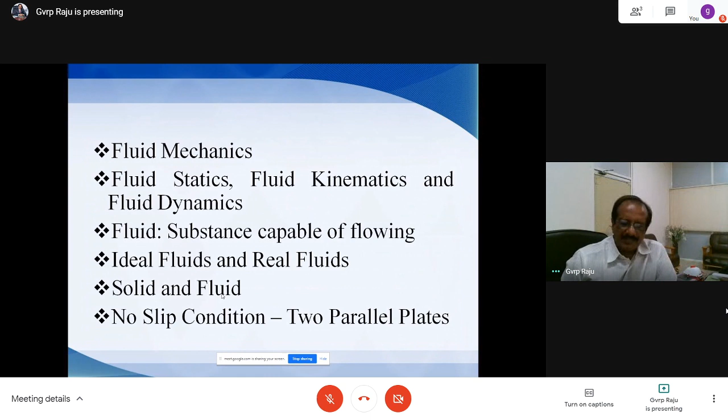When there is no relative motion between the stationary plate and the fluid on the stationary plate, we can say that it is no slip condition. Very important from objective, GATE point of view. I'll come back to the viscosity. So when there is no relative motion between the stationary plate and the fluid which is close to the stationary plate, we can say that it is no slip condition.

Then the fundamental properties of the fluid. In fluid mechanics, the fundamental properties are very, very important. You will be getting these properties in almost each and every part of your fluid mechanics subject: fluid dynamics, fluid statics, flow through pipes, etc. The student who is not aware of the fundamental properties will face difficulty in understanding the subsequent chapters.

It is not difficult to know the fundamental properties, but one issue in fluid mechanics, particularly for civil and mechanical students, is you should have confidence in units also. What are the units for a particular property? The conversion of one system of units to another is also very important. For example, take mass density. Mass per volume, very clear. Mass of the fluid in a given volume, at 4 degrees centigrade normally for water.

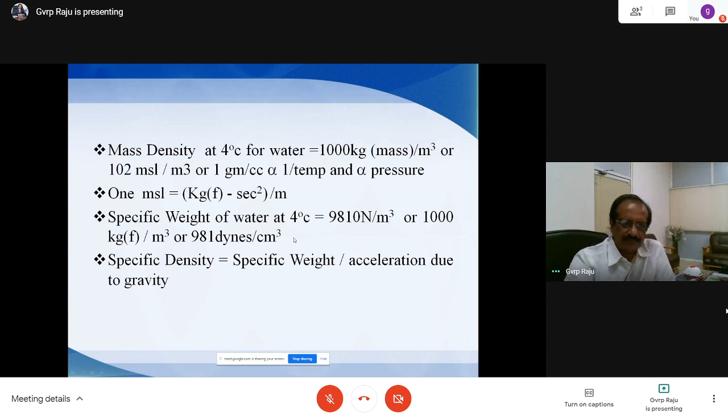The other is specific density, in other words, mass density. Mass density rho is equal to specific weight by acceleration due to gravity. g, as you know, is 9.81 meters per second square. So specific density is equal to specific weight by gravity. Density is normally represented as rho, and the specific weight is small w, by small g. So rho is equal to w by g. It is a very important, very small relation. The other one is specific volume.

Specific volume is the reciprocal of mass density or specific weight. For gas problems and gas flows, you can take specific volume as the reciprocal of mass density. That means specific volume equals 1 by mass density or 1 by specific weight, that is, 1 by rho or 1 by small w.

What is the unit of specific volume? Since it is 1 by rho, it is meter cube per kg. As you know, the unit of mass density is kg mass per meter cube, so specific volume is meter cube per kg mass, the reverse. Again, specific weight is Newton per meter cube in SI system, so the unit of specific volume is meter cube per Newton. It is just the reciprocal of mass density and specific weight.

Don't confuse about the units. Specific volume unit is 1 by rho, and specific weight is 1 by small w. That means meter cube by kg force, and meter cube by Newton also. So volume of the fluid by specific weight or 1 by rho, the units are the same. So meter cube, either I can take meter cube by Newton or meter cube by kg.

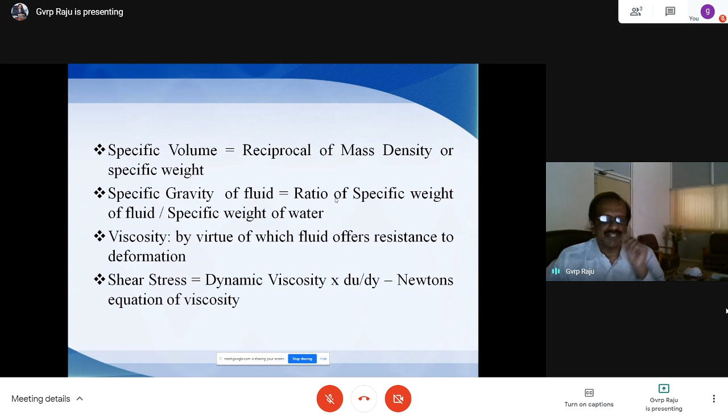Sometimes students also give a unit for specific gravity, but specific gravity has no unit at all. It is the ratio of specific weight of fluid by specific weight of water, same units, so they cancel out. Specific gravity has no unit. Sometimes even in examination objectives a unit is given for specific gravity, but specific gravity has no unit.

Yes, so the other important property is viscosity. A very important point. Viscosity is a fundamental, very important property. What exactly is meant by viscosity? Viscosity is the property of the fluid by virtue of which the fluid offers resistance to deformation. Whatever resistance is offered by the fluid is only because of viscosity.

This is an important property, and you have Newton's equation of viscosity. We'll come back to that. Newton's equation of viscosity is a famous equation, and based on that we can solve many problems. Shear stress is shear force by area, which is equal to dynamic viscosity, mu, into du by dy, where du is the change of velocity and dy is the distance, giving the rate of deformation. So shear stress, tau, equals mu into du by dy, Newton's equation of viscosity.

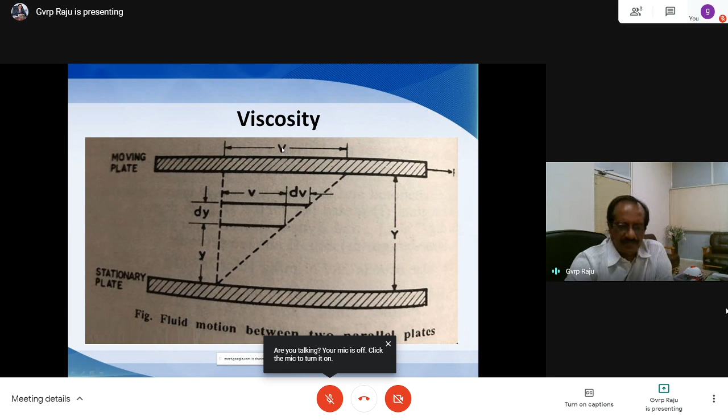This is the top plate here, which is moving with a velocity v. The fluid velocity here is zero. The fluid which is close to the bottom plate adheres to the bottom plate, and the fluid which is close to the top plate adheres to the top plate. The fluid attaches here with zero velocity, and joins here with velocity equal to the velocity of the top plate. In other words, the fluid velocity at the top plate is the velocity of the top plate, and the fluid velocity at the bottom is the velocity of the bottom plate. It is zero here and v here, and this is a linear variation.

The velocity varies from 0 to capital V. The velocity of the fluid varies from minimum 0 here, 0 to capital V.

This plate is moving with a velocity v with a shear force F here. So the plate is moving with velocity v with shear force F. So what is shear stress? Shear stress is force by area. A is the area of cross section of the top plate. So the shear stress is equal to force by area.

Suppose there is an increase in shear force, what happens to velocity? With increase in shear force, the velocity also increases. Because the plate is moving with force, the velocity also depends on the application of shear force on the top plate. So the velocity of the top plate depends on the shear force applied. In other words, the force is proportional to the velocity. With more force, more the velocity of the fluid here. With less force, less the velocity of the fluid here. I am coming to how the relation, how Newton's equation of viscosity comes out with these simple concepts.

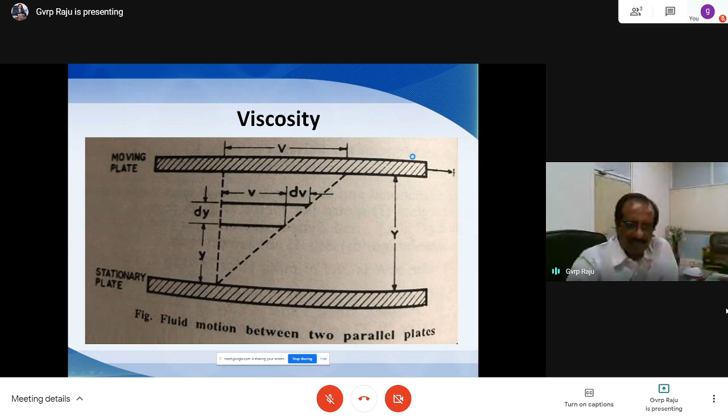In other words, we can say that the shear stress is proportional to d by dy. When shear stress is proportional to d by dy, and you want to make it equal, shear stress equals some proportionality constant multiplied by d by dy. This is the concept here. Shear stress is proportional to d by dy, and when made equal, this dynamic viscosity is the constant multiplied by d by dy. This is Newton's equation of viscosity.

Here two aspects are important. One is the shear stress is proportional to d by dy, and the proportionality constant is dynamic viscosity. I will come to viscosity in a short time. Newton's equation of viscosity has two assumptions. One is the two plates are parallel, should be parallel. The second is the spacing between the two plates must be minimum, otherwise you cannot expect a linear variation. Those two are the assumptions. Based on the assumptions, you can derive Newton's equation of viscosity.

So now what is dynamic viscosity? Dynamic viscosity is also called coefficient of viscosity, same name. You may be thinking that coefficient of viscosity may be different and dynamic viscosity may be different, or viscosity may be different, but coefficient of viscosity, dynamic viscosity, and viscosity, all three are the same.

Sometimes it may deliberately confuse you about viscosity. Viscosity always means dynamic viscosity, or coefficient of viscosity, or dynamic viscosity, or viscosity - all three terms are the same.

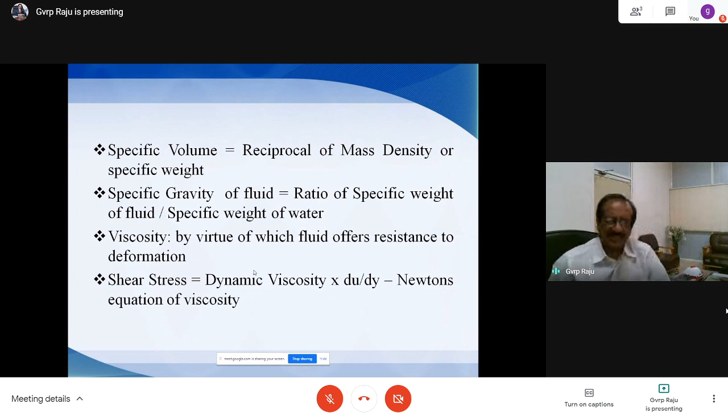Next is units. Units are very important in fluid mechanics, particularly the conversion from one system to another. Viscosity is equal to tau by du by dy, shear stress by rate of deformation, and the unit in SI system is Newton seconds per meter square.

What is the conversion between Newton and kg? It is 1 by 9.81. So 1 Newton second per meter square is equal to 1 by 9.81 kg seconds per meter square, which equals 0.102 kg second per meter square, which equals 10 poise. Poise is a common unit normally given in examinations.

It is the system of unit in CGS system for viscosity - 10 poise. This important relation between one system and another has a lot of importance and advantage while doing problems or understanding concepts. Normally we get confused in systems of units, so it will be made very clear here.

Sometimes it will be given in centipoise. Centipoise is 1 by 100 poise. And 10 poise is equal to 10 dynes seconds per centimeter square. Dynes is the force unit in CGS system.

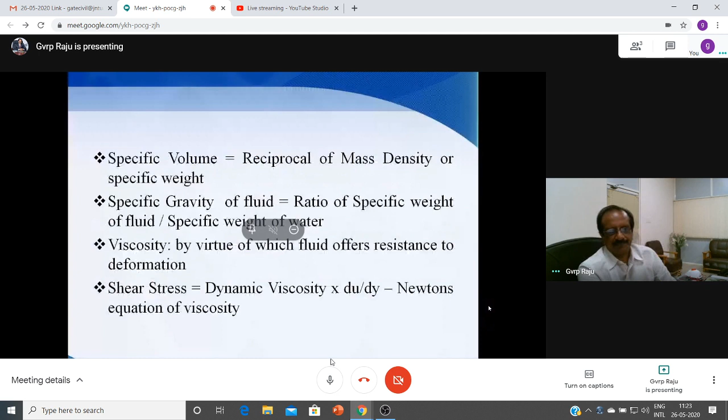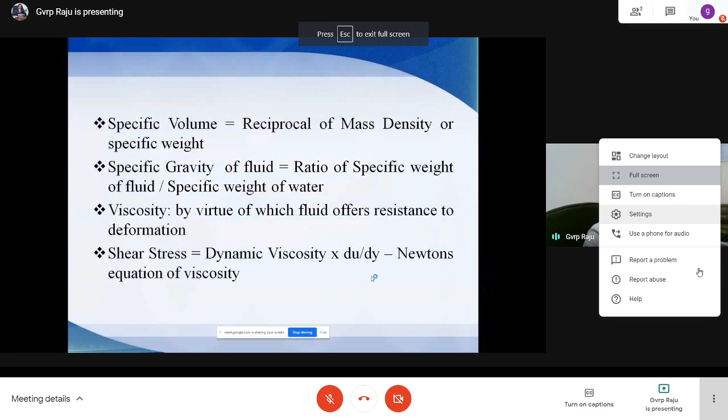Viscosity, and the other issue we are discussing is kinematic viscosity. Kinematic viscosity is equivalent to dynamic viscosity by mass density, and the unit is Stokes. Normally the unit of poise is for dynamic viscosity and the unit of Stokes is for kinematic viscosity - both are very important. Normally problems give something in Stokes, something in poise.

Instead of giving kg force per second square and all these things, it will be given in Stokes. One Stoke is equal to square centimeters per second in one system of units; in the other system it is meter square per second. So kinematic viscosity is also very, very important, and the relation between kinematic viscosity and dynamic viscosity is important: it is nu and this is mu, so nu is equal to mu by rho, and the units are very, very important.

The other thing to remember: for gases, viscosity is proportional to temperature. Gases and liquids are both fluids. So viscosity is proportional to temperature for gases, and for liquids, viscosity is inversely proportional to temperature. Please remember this: gases - viscosity proportional to temperature; liquids - inversely proportional to temperature.

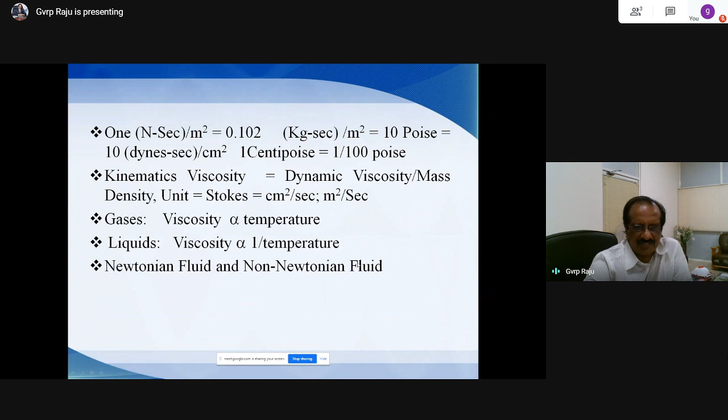This picture shows different types of fluids. On one axis is shear stress, tau, and on the other is the rate of deformation, dV by dy. Here we have Newtonian fluid, which has a linear variation between tau and dV by dy. Newton's equation of viscosity is tau equals mu into dV by dy, so tau is proportional to dV by dy. When there is a linear variation between stress and rate of deformation, the fluid is Newtonian and obeys Newton's equation of viscosity.

The other type is non-Newtonian fluid, which doesn't obey Newton's equation of viscosity. It exhibits a non-linear variation between stress and rate of deformation. You can see here plastic, thixotropy, and ideal fluid represented on this graph.

Ideal fluid, as discussed earlier, has no surface tension, no viscosity, and none of these properties. Whatever the stress, even when stress is zero, ideal fluid undergoes continuous deformation with no resistance offered in the opposite direction. This represents ideal fluid. For elastic solid, the deformation is zero while stress is non-zero. This ideal fluid concept is important for objective type questions.

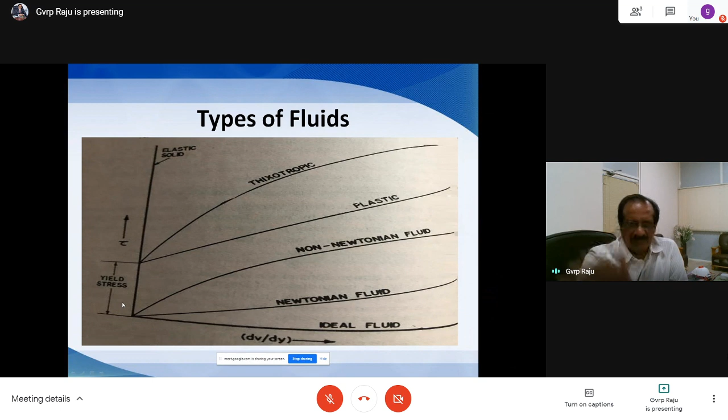You get questions on types of fluids quite often in GATE examinations. The study of non-Newtonian fluid is also called rheology. We have Newtonian and non-Newtonian fluids, and sometimes questions ask what rheology means. Rheology is the study of non-Newtonian fluid, which doesn't obey Newton's equation of viscosity and shows a non-linear variation between stress and rate of deformation. Thixotropy, plastic, and ideal fluid behaviors are just as I mentioned in the figure.

The other topic is compressible and incompressible fluids, that is, compressibility. Compressibility is a measure of change of volume with the application of pressure. So when a material is subjected to pressure, what happens to its volume—that is called compressibility behavior. It measures how the fluid changes when pressure is applied to it.

Quantitatively, compressibility can be expressed as the inverse of bulk modulus. Bulk modulus is K, and compressibility is proportional to 1 by K. In other words, when you apply pressure, you measure the change of volume with reference to the original volume. So bulk modulus K is equal to minus dP by dV by V, where dP is the change of pressure.

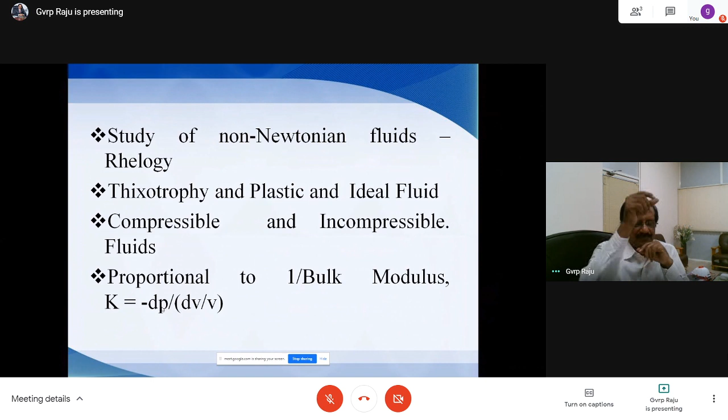For example, take a piston-cylinder arrangement containing a fluid - a general, simple arrangement. The pressure applied through the piston is initially P1, and the original volume of the fluid is V1.

Now you move the piston downwards in the cylinder, increasing the pressure from P1 to P2. As a result, the volume V1 is reduced to V2. So when there is an increase in pressure, the volume decreases. The pressure change is P2 minus P1, and the volume change is V2 minus V1.

Then what is dP by dV by V? This is sometimes asked in exam papers. Here dP means P2 minus P1, and dV means V2 minus V1, with V1 being the original volume. So the expression becomes P2 minus P1, divided by V2 minus V1, divided by V1.

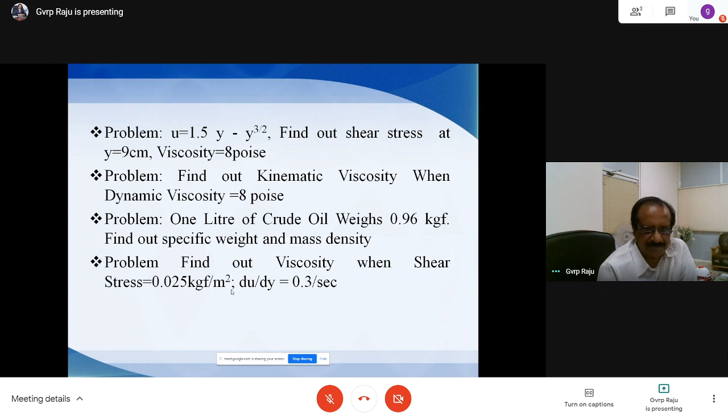Same equations. So here tau is equal to mu into du by dy, Newton's equation of viscosity. Here kinematic viscosity is mu by rho. And here, fundamentally, specific weight is weight by volume, and mass density is mass by volume. The fundamental relations. All these four are very simple, provided you know Newton's equation of viscosity and conversion of one system of units to other system of units. And the other one is bulk modulus.

The other problem here is, he has given the pressure change. So this is bulk modulus K. As you know, K is equal to change of pressure by change of volume to original volume. So the bulk modulus is equal to change of pressure by change of volume to the original volume.

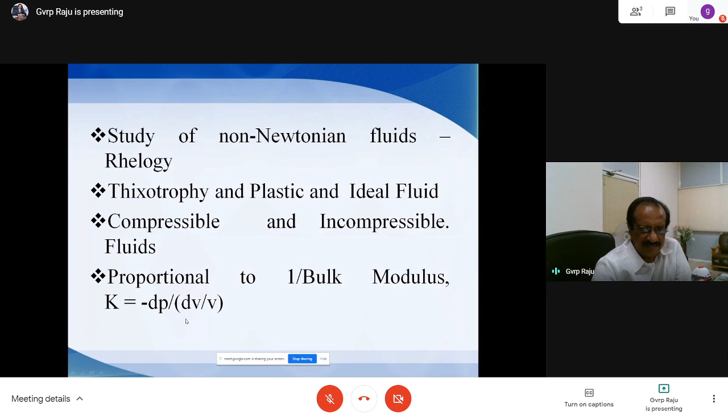We take a small problem, right? The pressure change is 40 kg per centimeter square, and volume decreases by 0.2%. When there is increase in pressure, obviously volume decreases. And what is the value of K? So K is equal to change of pressure 40 by volume decrease by 0.2%. He has given dV by V as a percentage. That means it is 0.2 by 100.

So 40 is the change of pressure. So 40 divided by 0.2, because it is in percentage, so you need to take it by 100. So 40 by 0.2 by 100. So we are getting 800 kg force per square centimeter. The change of pressure is 40 by dV by V. dV by V is 0.2, not in percentage, 0.2 by 100. So this value is equivalent to 800 kg force per square centimeter.

So this is, okay. So the equation is 40 divided by 0.2 into 100. 20,000. Okay, not 800, 20,000. So this is the answer here. 40 by 0.2 by 100.

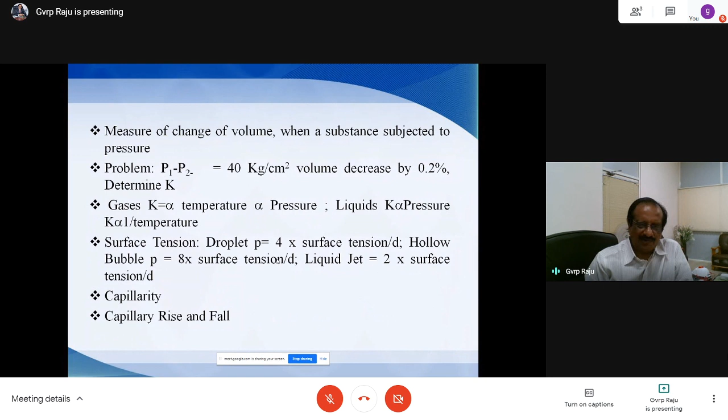So capillarity is the phenomenon of rise and fall. You can say it is capillarity. For example, see here, there is a rise here. And see here, there is a fall. This is the liquid surface here.

If you dip a capillary tube, so here we have dipped this capillary tube in the water. This is the free liquid surface, and there is a rise of water here. And this height is called a capillary rise. Whereas if you place this capillary tube in mercury, what happens here? There is a depression.

Mercury specific gravity is 13.6, and water specific gravity is 1. So when you place a capillary tube in water, there is a capillary rise. When you place a capillary tube in mercury, which is strong in cohesion, there is a depression. So the phenomenon of capillary rise and depression is called capillarity.

Capillarity is the phenomenon of capillary rise and depression, and it is due to both cohesion and adhesion. Normally asked in objective type questions: surface tension is due to cohesion and capillarity is due to both cohesion and adhesion. Cohesion is intermolecular attraction, adhesion is attraction between liquid molecules and molecules of a solid. Very, very important.

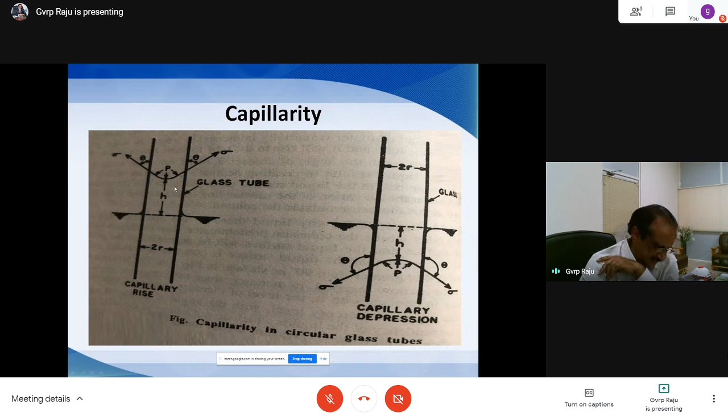If it is a 1 mark objective type question, you need to remember the equation and also the procedure of getting the equation, which is also required for 2 marks and 5 marks questions. So both are important. Upward force is equal to downward force. Downward force is due to weight of water in this area, and upward force is due to surface tension.

So finally H is equal to 4 sigma cos theta by WD. Take a small example here on surface tension. He has given the surface tension here at 20 degrees centigrade equal to 0.0073. That is surface tension, and the pressure he has given is 0.0015 kg per centimeter square.

To convert into one system, it is meters here and centimeters here. Convert either into meters or centimeters, both are same. Convert both into one system here. So we have P in kg per meter square and surface tension value in kg per meter. Now we have a surface tension value and we also have the pressure value.

It has also to find out the diameter of the water droplet. Let us say it has not given, but water. Then what should be the diameter of the water droplet? We have three equations for surface tension. One is P equal to 4 sigma by D, that is for water. P equal to 8 sigma by D, that is for soap bubble. And P equal to 2 sigma by D for liquid jet.

So this is for water. Water means you need to use the equation P is equal to 4 sigma by D. The P value is there, convert it in kg per meter square. 4 sigma, 4 into sigma, sigma value is there, 4 into 0.0073.

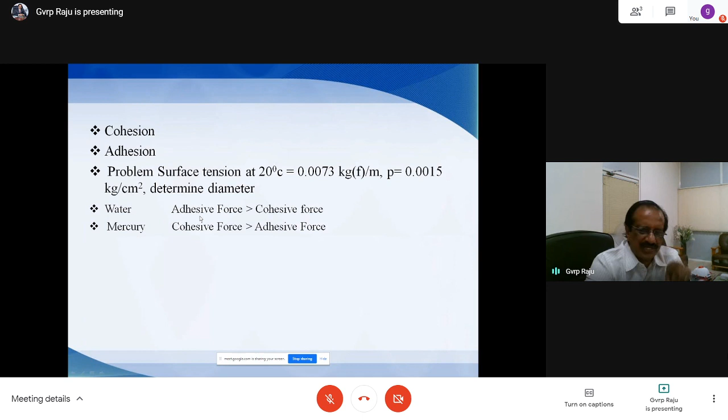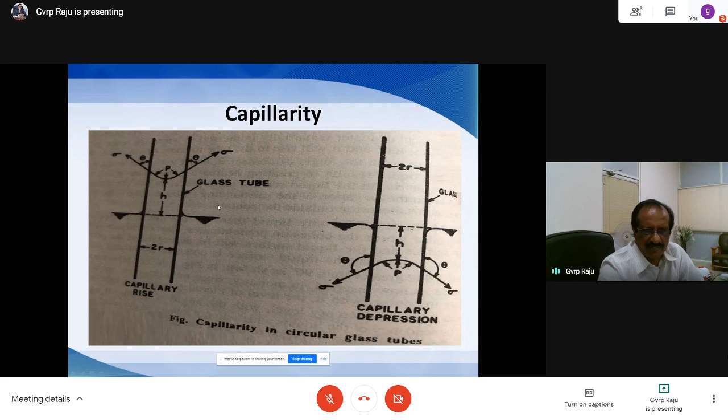And the contact angle, if you see the contact angle between glass and water, for example if you see here, this is the contact angle between glass and water, it is 0. Whereas between glass and mercury it is around 130 degrees. So contact angle between glass and water is 0. If it is 0, what is cos 0? Cos 0 is 1. And the contact angle for mercury and glass is 130.

So you can find out the capillary rise for water and capillary depression for mercury. Sometimes he is giving water and also mercury. Sometimes he may be asking capillary depression, sometimes he may be asking capillary rise. So the equation is H equal to 4 sigma cos theta by W1D. 4 sigma is the surface tension, theta is the angle of contact, it is 0 for glass and water, so cos 0 is 1, and 4 sigma by W1D.

Sometimes we have water and sometimes we have oil or anything like that. For example, the specific weight of water is 1000 kg force per meter cube, and if the specific gravity is 0.9, the specific weight of that 0.9 fluid is equal to 900. It is simple because the specific gravity of a fluid is the specific weight of the fluid divided by the specific weight of water. Specific weight of water is known, so if you want to find the specific weight of the fluid, multiply specific weight of water by specific gravity.